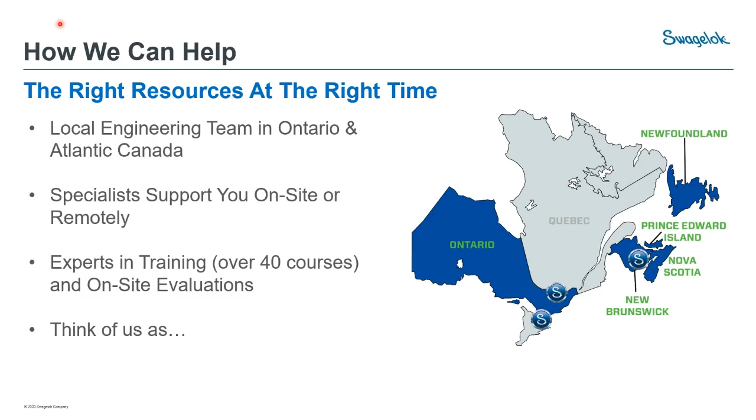Swagelok Central Ontario and Atlantic Canada has 3 locations: Mississauga, Ontario, Ottawa, Ontario, and Saint John, New Brunswick. We provide local engineering and technical support across central, eastern, and northern Ontario, as well as all of Atlantic Canada. We're one part of an extensive global network of Swagelok sales and service centers that are here to help you with your applications and share knowledge through our extensive training and system evaluation offering, much of which we are adapting to provide virtually to you. Whether you need help with an application or to improve your knowledge in a specific area, whatever your pressure, think of us as your solutions provider.

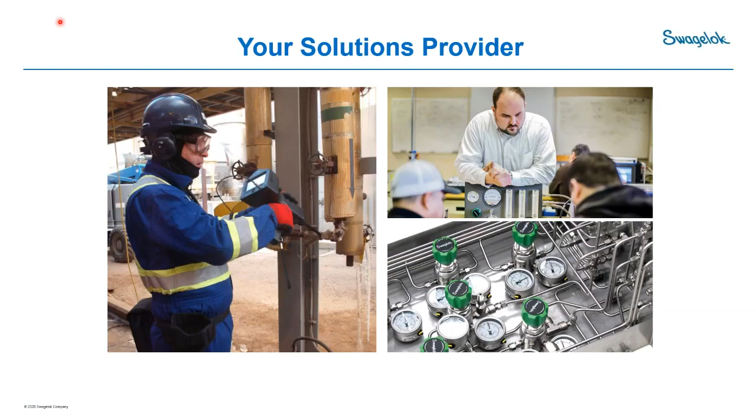Thank you, Tim. My name's Phil Reid. I'm the Training and Technical Support Manager here at Swagelok Central Ontario and Atlantic Canada. We manage a team of field engineers. We provide training, fabrication, assembly services, and resources to support you.

Joining me today, we're very fortunate to have Phil Daniels. Phil is a professional engineer here in the province of Ontario, and he's a mechanical solutions engineer. Phil's formal education is in mechanical engineering, specifically focusing on thermofluids, with 6 years with the Swagelok organization. Phil is one of our technical support advisors in hose. He can perform audits and hose advisory, pressure regulator selection, and solutions for high pressure systems right up to 60,000 PSIG, and seal support systems, API 682 and various other seal plans.

And Phil's dressed here in gear ready to go in and do an audit in a plant. So Phil will be helping and supporting and answering some of the questions as they come in today. We have a fairly large crowd and we like to share that. We put 2 Phils on this just so that we would confuse everybody right off the start.

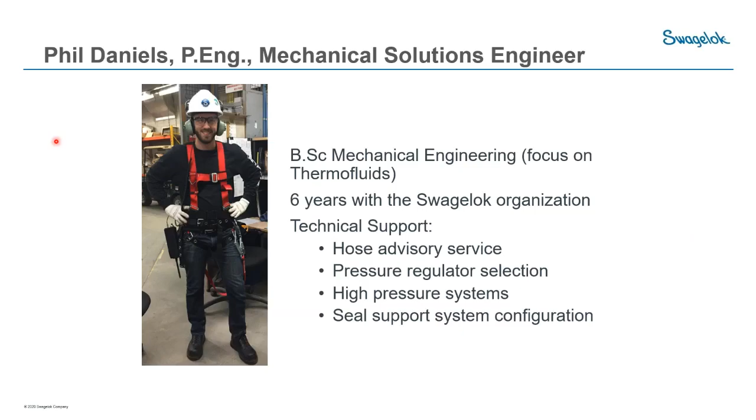So today's Tech Talk is around regulator basics, and specifically today we want to talk about the difference between a valve and a regulator. We want to understand some terminology around regulators because the speak is always the same. We'll differentiate components within the regulator and what their jobs are and how they contribute to performance, and then recognize these performance attributes of various regulators.

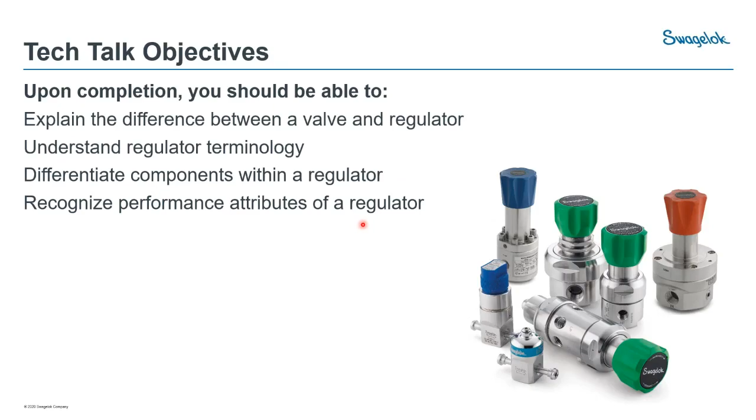So today's talk will be around the 2 most common regulators used today, the first being a pressure reducing regulator, reducing pressure from a higher pressure to a lower pressure. We'll talk about the performance criteria, some of the terms and definitions, and how this applies to selecting a regulator.

We're going to look at back pressure regulators. Back pressure regulators are a little bit different than a pressure reducing regulator, so we'll get into the basic theories of a back pressure regulator. We'll also talk about the terms, definitions, and criteria for selecting one. Then we'll put all of this together and come up with how we judge performance and the criteria that affects selecting a regulator.

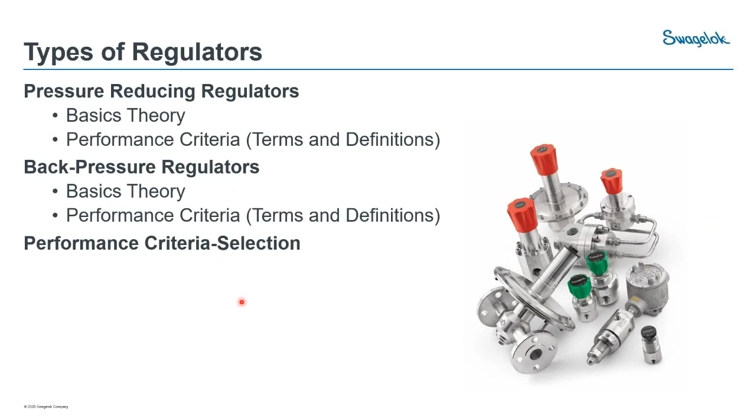So we're going to start by talking a little bit about a valve, and how a valve controls flow while a regulator controls pressure.

A manually operated valve like this does not self-adjust to maintain flow. A pressure regulator will self-adjust to maintain a specific pressure. If we're looking at a higher pressure, reducing it down to a lower pressure, it's dynamically working all the time to maintain that pressure, so it provides a constant pressure so that an orifice can control flow. If you have a regulating stem tip or metering stem tip on the valve, you simply extract or draw that stem out, increasing the cross-sectional area of the orifice. So regulators control pressure, valves control flow - two separate jobs.

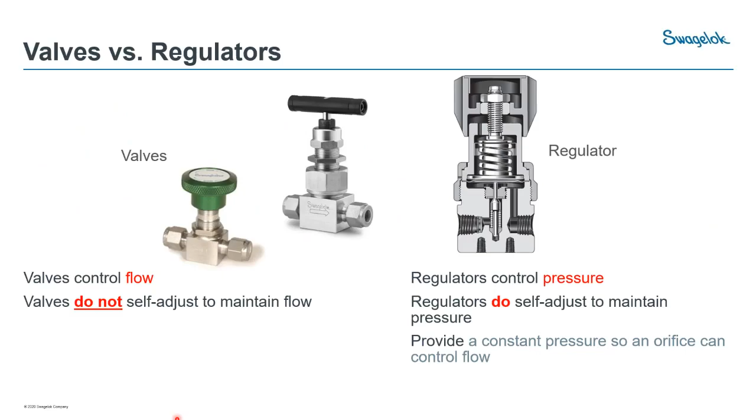Let's look at these two regulators we're going to talk about today. First, a pressure reducing regulator controls pressure by sensing outlet pressure, and controls its own downstream pressure. Here we have a high pressure source being supplied to a regulator at the inlet, going to the sensing chamber and providing that constant downstream pressure to a process, experiment, or instrumentation.

What a back pressure regulator does is control pressure from the process, and it controls upstream pressure. Similar to a relief valve, but it is not a relief valve. As pressure builds in the process, this will open when the pressure is built, and it controls upstream pressure. So that's a back pressure regulator and a pressure reducing regulator.

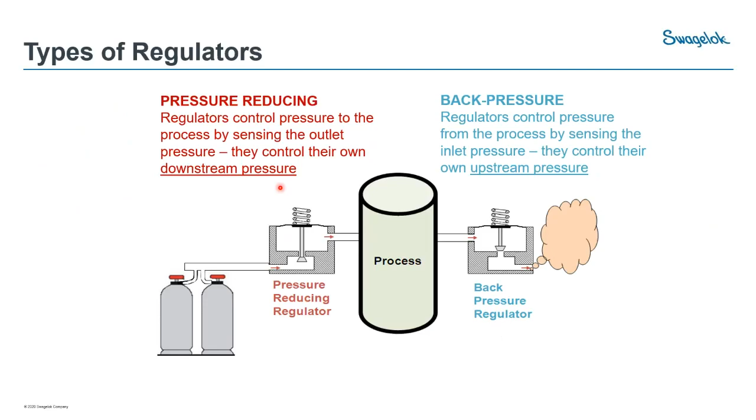Let's take a closer look at a pressure reducing regulator and how they're constructed. First, we have a control knob or adjustment knob at the top - this can be a thumb wheel or knob. We have the stem, which has fine threads on it, fine pitch threads, so you can get more accurate control. There will be a range spring. If you have a regulator that is 0 to 100 psi or 0 to 500 psi, the bodies may be the same, but the range spring will change.

That's the force applied to the sensing element. As we move on down, we have the body cap, the cap ring, and inside we have the convoluted diaphragm, which is the sensing mechanism. Behind that, there's a backer plate so that if someone reversed these orifices, you wouldn't have a catastrophic failure and blow the diaphragm out. We'll talk a little more about these later.

So we have an inlet, and on the inlet of these regulators, notice there's a fine filter in here - when I say fine, it's 25 micron. Most regulators cannot tolerate particles because this is a very small space, and we'll talk more about that as well. So we put a filter in here to try and catch the fleas and ticks, if you will, and not the cats and dogs. Moving ahead, we have the body and the outlet.

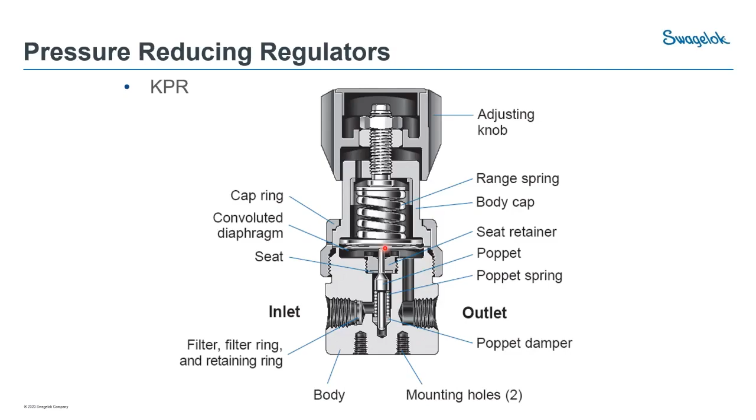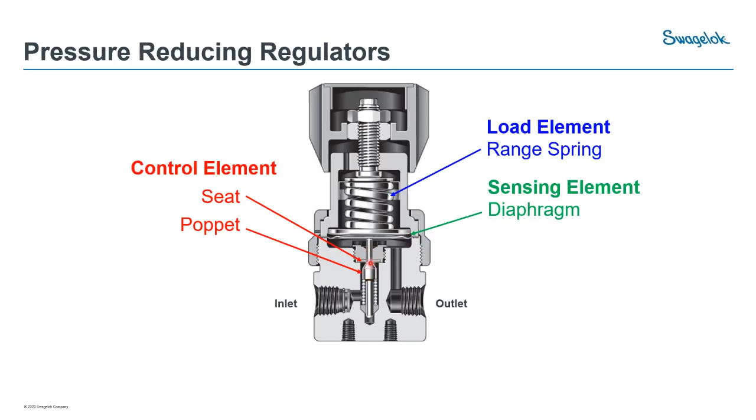This is the sensing chamber. We have the poppet and the seat. Let's break this down a little more and take a look at what's going on. So in the top of the regulator, in a pressure reducing regulator, we have the loading element, we have the range spring, which is applying the force onto the sensing element. And in the bottom of the regulator, we have the poppet and the seat, which are the control elements. These are dynamically moving to allow pressure to bleed up into the sensing chamber.

If we take a closer look at these parts in that control element, the poppet, we have a damper at the bottom, which helps with resonance or vibration of the poppet and prolongs life - it makes it more stable. There's a poppet spring. It provides a little bit of force to help close the poppet or seat the poppet into the seat. Keep in mind, a regulator is not a shutoff device - a regulator is unreliable to be used as a shutoff device. So the poppet seats into the seat, and then there's a retainer that holds this mechanism all together.

Above the sensing chamber, in the upper works, we have the loading element, the adjustment stem, and spring button, which simply keeps alignment of the range spring. We have the stop plate that is there - as I mentioned, if we have a catastrophic failure, someone reversed the ports accidentally of the regulator, and we did not have this, we could have a catastrophic failure or blowout of the diaphragm.

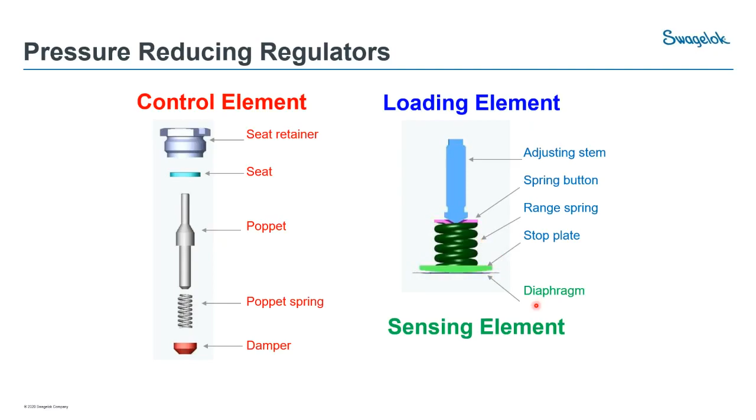So taking a closer look at the diaphragms, depending on the pressure, it will affect the sensitivity.

Diaphragms are generally used up to about 500 psig, and they have a backing plate as I mentioned. They have greater sensitivity, are more flexible, and have better compatibility since there are no elastomers in the wetted area of the regulator. This is an alloy X750 diaphragm, so it's metal.

In the piston sensing type, keep in mind there will be an elastomer that has to seal. When you get into higher pressures, 500 psi and up to 15,000 psi and beyond, it's a piston sensing mechanism, so it's a little less sensitive, still very sensitive, but a bit less. We've now introduced elastomeric materials to seal the system. So again, a diaphragm is typically used below 500 psi, and a piston at higher pressures.

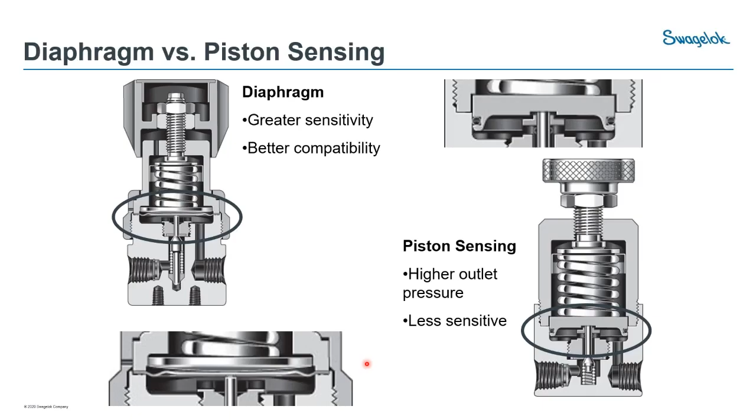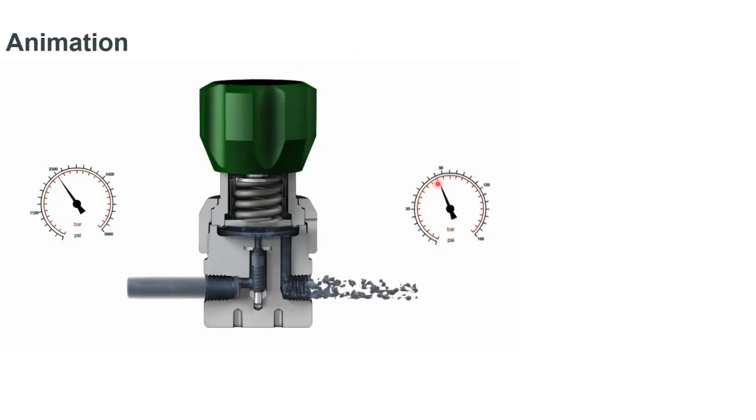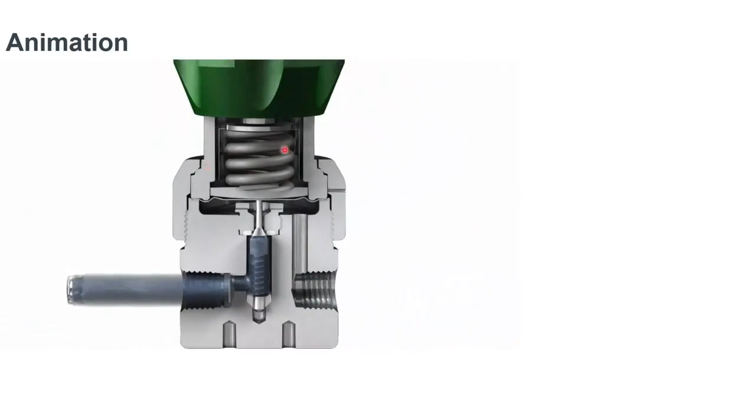Let's have a look at this animation and see what happens. As we tighten down the control range of this regulator, the pressure rises and puts a force on it. As that force pushes the poppet down away from the seat, it allows pressure to bleed up into the sensing chamber and then go to the outlet.

Taking a closer look at what's happening, we have forces that we're trying to balance. F1 is the range spring force acting down on the diaphragm sensing mechanism. F2 is the little poppet spring that also helps seat the poppet back in the closed position. We have outlet pressure forces acting on the diaphragm as well, which must be taken into consideration, and we have our inlet pressure forces.

So our force balance equation would look like this: F1 equals F2 plus F3 plus F4. If we change anything in this equation, we're going to get a different output.

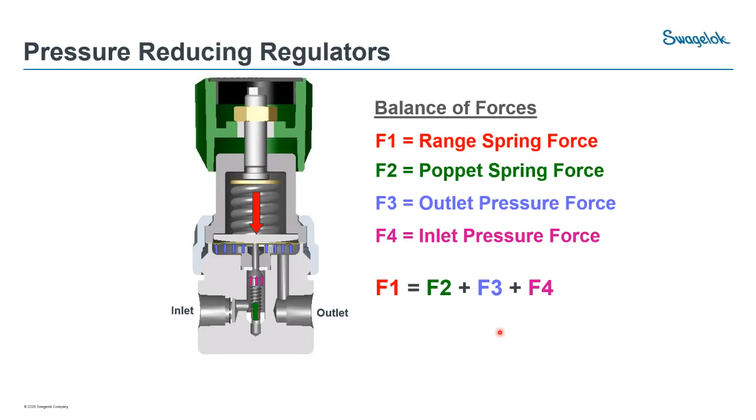Taking a closer look, we're going to look at the high pressure side. As we tighten down or compress the range spring at the top of the regulator, it pushes the poppet down away from the seat, allowing a small opening into the low pressure side for pressure to bleed in. As it bleeds past the poppet, it goes from high pressure to low pressure. This opening is about 2/10,000ths of an inch, or a fraction of a millimeter, so it's a very small opening.

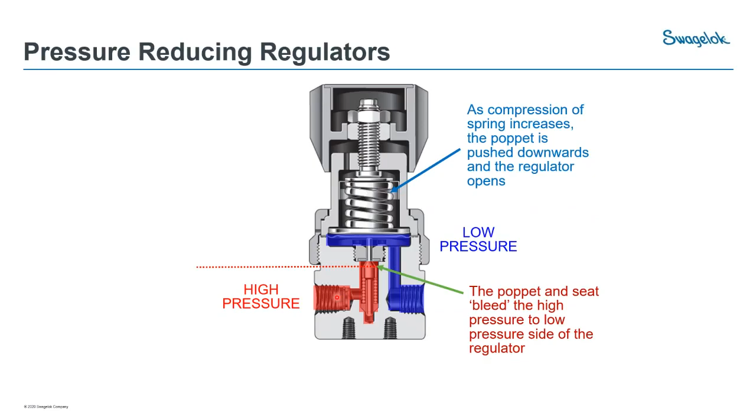Recall what I mentioned earlier about having a filter — we'll see the effects of this a bit later, but a very small particle in that very small area can have adverse effects on regulator performance. As the sensing diaphragm balances the pressure forces, it's continually, dynamically moving as things change, balancing these forces to continually give you that output pressure. That's basically how a pressure reducing regulator works.

And with that, Phil, do we have any questions at this point?

One question so far: what is the piston rated for? Good question. The typical sensing element styles are a diaphragm style, which could be metal or sometimes other elastomers, or a piston element. The diaphragm, while more sensitive, has a lower pressure rating, but the piston can be rated up to 10,000 psi in most regulators at the high end. So the inlet rating of the regulator would be 10,000 psi, as well as the piston itself — well suited for high pressures up to 10,000 psi.

Thank you, Phil. Now let's look at a back pressure regulator. It works a little differently, but we have a loading element, a sensing element, and a control element, similar to before. In this example, we'll notice we do not have a poppet — there are poppet-style back pressure regulators that we also manufacture, but in this case there is no poppet. A spring force is set for the upstream pressure, since we want to maintain a specific pressure, and we set that through the range spring.

As we have this set, the seat is initially closed. We can see that the diaphragm here is sealed down onto this elastomer. There's no poppet. So now the force of the spring is forcing the sensing element down to seal on the seat. Then, if the pressure is less than the set pressure, this will remain closed.

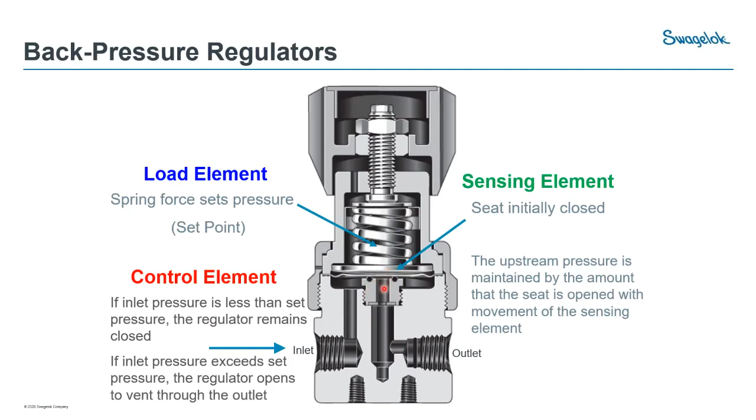This is called accumulation, and we'll look at that a little bit later. But as we increase pressure, this will open more, and so you will have an increase in the amount of pressure. So just having a look at these two, we look at our pressure reducing regulator here on the left and our back pressure regulator on the right.

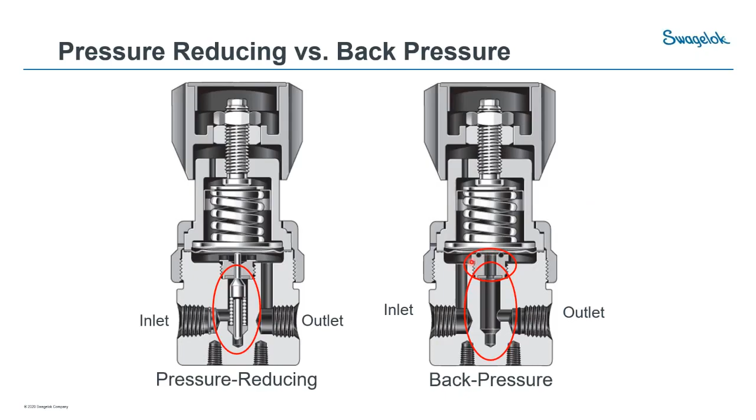So if you notice a couple of things, we're looking at the inlet going up through the poppet and then bleeding into the sensing chamber. In the back pressure regulator, the inlet goes into the sensing chamber and then senses, and if it increases, it will then lift the diaphragm off the seat and allow that pressure to vent out.

So very similar to our pressure reducing regulator, we have these key elements, and the force balance equation again, we have F1 being the spring force, so the loading force. The next force we have is this inlet pressure force acting on the diaphragm, and this is a convoluted diaphragm too, by the way, because that increases the surface area and has an effect on increasing sensitivity. Force equals area times pressure. So if we increase that surface area, we have a greater sensitivity.

And then we have the outlet pressure forces. When they're present, these must be lower than the inlet pressure force, obviously, because otherwise it would start to raise the diaphragm and allow it to bleed in the opposite direction. So again, these go together and it looks like F1 equals F2 plus F3. And as we apply the load, as we mentioned, the force down onto the element, it's being sensed, and then we have this balancing of forces.

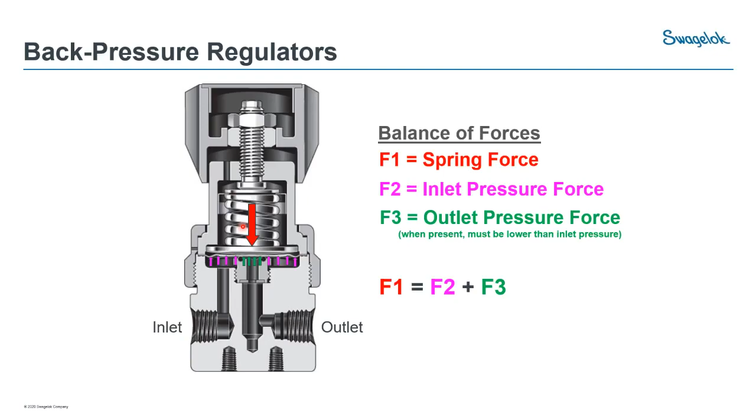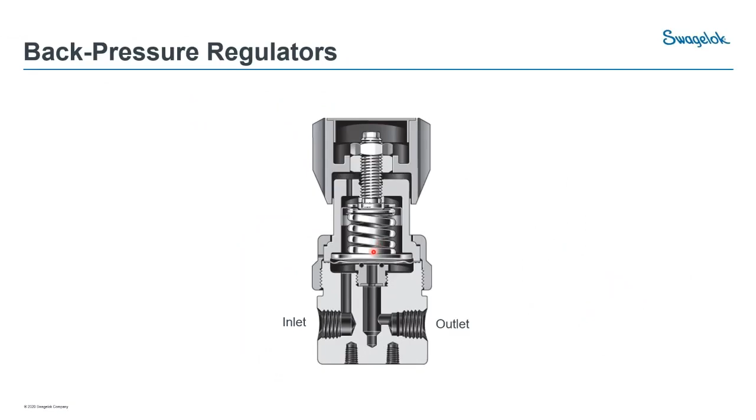So we have the regulator with the inlet, and as this compresses this spring, it's held down onto the elastomer that seals it up, and here we have pressure present in the sensing chamber. Now that pressure has overcome the force of the spring and allowed pressure to, if you will, bleed off through the outlet.

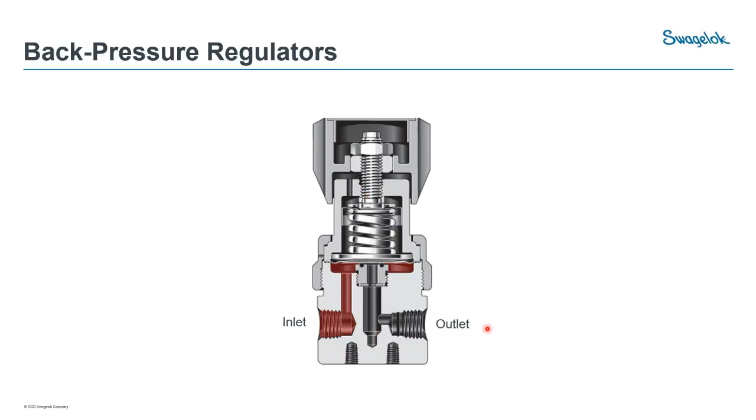Phil, do we have any questions on back pressure regulators at this point?

Thanks, Phil. Yeah, we have one question here of when would you use a back pressure regulator versus a relief valve? Great question. Functionally, they are both very similar. They have a sensing element and then they lift to sort of bleed off pressure, but it's more about the application and where they should be used. So a back pressure regulator is intended to be a more sensitive device and used in a regular process. So it should normally open and modulate to set a certain process pressure. For example, it may be set at 100 psi if you want to maintain a process at 100 and not any higher. So if pressure does build up, it will bleed off and slowly open to relieve that excess pressure.

Whereas a relief valve is more of a safety device. So again, it does sense that pressure and relieve when there's overpressure, but it would be above the normal working pressure. For example, the process would be 100 psi. The relief valve may be set at 120 psi. So if there is that overpressure event, it can bleed off and relieve that excess pressure. Now it's important to note there's certain situations where there's an ASME safety code relief device required, so that is a special consideration. And of course, back pressure regulators should not be used in that application.

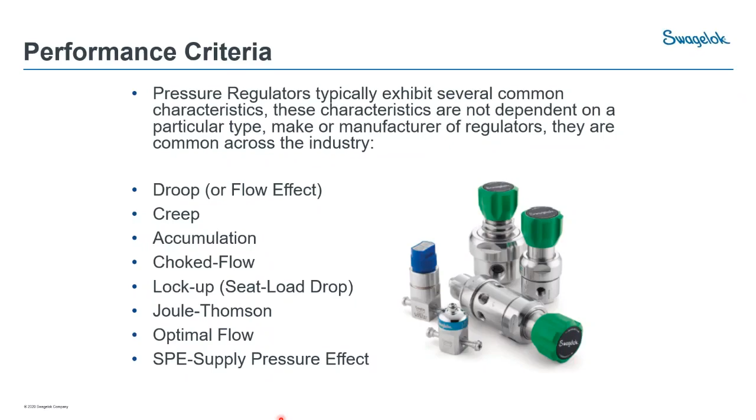So again, regardless of who the manufacturer is or the type of regulator, it will exhibit these characteristics, and these are used when you're looking at flow curves. The flow curves are absolutely the best way to select a regulator.

So the CV of a regulator is measured when it's in the fully open position, and most regulators do not function in the fully open position. So in practice, the C sub V of a regulator is variable as it throttles. Remember, it's in a dynamic situation, so this is moving and it's basically throttling.

So the flow curves in the catalog provide the best means of determining the CV, as these are based on actual flow data. All the curves that we provide, and Phil Daniels, and we have a couple other regulator specialists, can provide you with help when selecting a regulator, to get you to an optimal flow range that's going to give you the optimum performance.

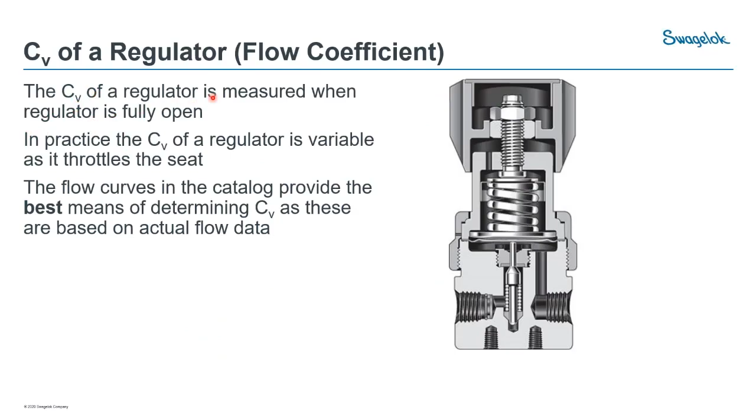So flow curves are the best. If you're sizing using the C sub V, keep in mind that that CV is at the fully open position, and we'll take a look at a flow curve. So the best method is to use a flow curve.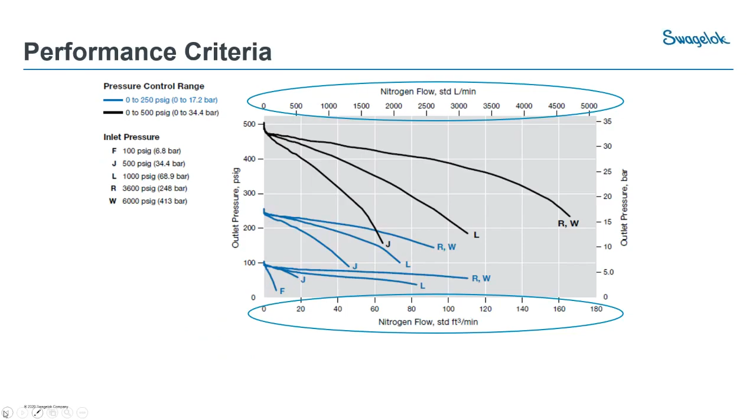So let's take a little closer look at what we're talking about. The first one is droop or flow effect. If we've set the regulator static, in a static condition here at about 22 psig, what happens as soon as we start to flow - we get what is called seat load drop. So it drops, and then we start into a flowing condition. Droop is the reduction in outlet pressure experienced by pressure reducing regulators as the flow increases. So this curve is known as droop - as flow increases, a flow effect, you start to experience droop on the flow curve.

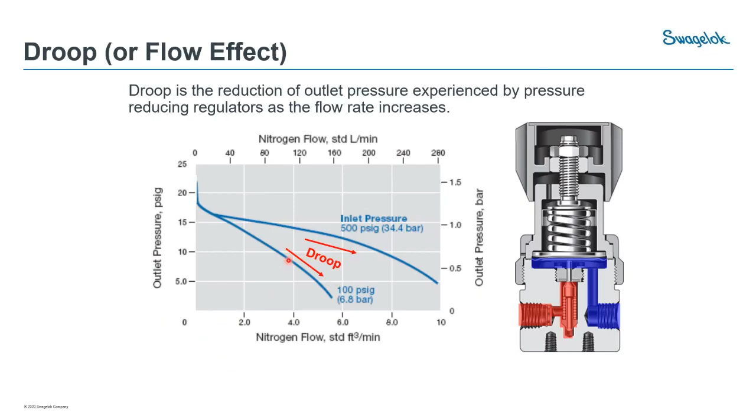So now looking at this, we can determine where our optimum flow range would be. Let's take a little closer look at droop. We've set our regulator static at the 22 psig, but now we've increased flow. We now have more flow required downstream, to around 2 standard cubic feet per minute. As we increase up to 4 standard cubic feet per minute, we drop down below 15 psi. As we increase out to around 6, we're down probably to 12 or 13 psig.

So we haven't adjusted the regulator. All we've done is increased the flow demand downstream. So now we're starting to have an effect on the regulator, and that is the droop of the curve. If we go on down, looks like around 9 psig in our outlet pressure at 8 standard cubic feet per minute. So taking a look at these flow curves, you will be able to determine, with other information we're going to talk about, if the regulator is suitable for your optimum flow and pressure range.

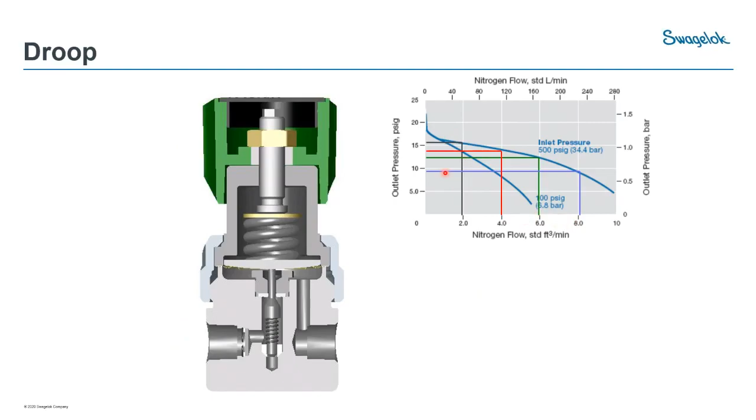Another thing that's very important is creep. Creep is an increase in outlet pressure over time. A regulator is not a shutoff device, and there's a very small gap when the poppet drops away from the seat, in that 2/10,000ths of an inch range, for the pressure to bleed through. So you can imagine if a small particle got lodged in there and held this regulator open, we're going to start to experience creep.

It's if the poppet does not fully seat in the orifice, and this can be caused by contamination, and this bleed through can equalize over time. So over time, the leakage can increase to a point where it's equal to the inlet pressure.

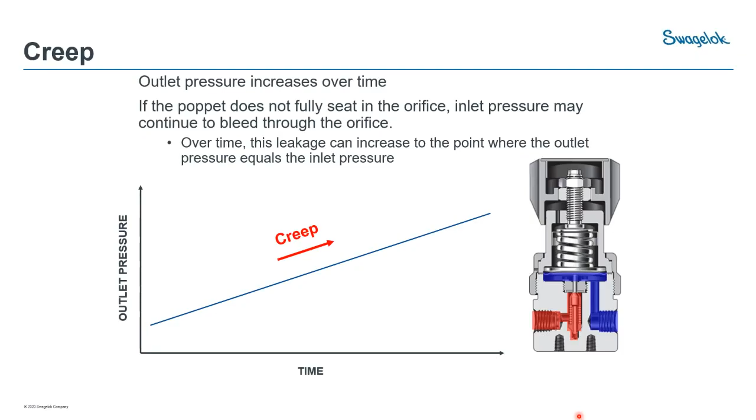So some of the causes of creep: number one is contamination. Something to keep in mind when setting up your system—if it's off a cylinder, for example, you get a certificate saying the gas is 99.99% pure, but you don't receive anything indicating how old that cylinder is or where it's been. So there can be rust or different contaminations inside the cylinder.

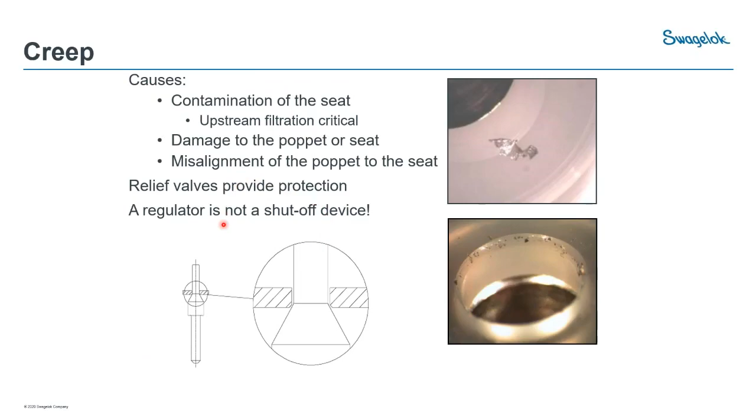This can damage the poppet and the seat. Misalignment of the poppet can also happen. These are actual photographs of particles deposited onto that tiny seat. As I said, when that opening is about 2/10,000ths of an inch, a very small particle would keep it open and allow it to continue to bleed. Keep in mind—I'll repeat it a few more times—a regulator is not a shutoff device.

So why is creep dangerous? If you have, arbitrarily, a 3000 psig source and you're dropping it down to 100 psig, and the downstream is designed for this lower pressure—if this valve got shut off and we're experiencing creep in this regulator, we could have some catastrophic effects downstream.

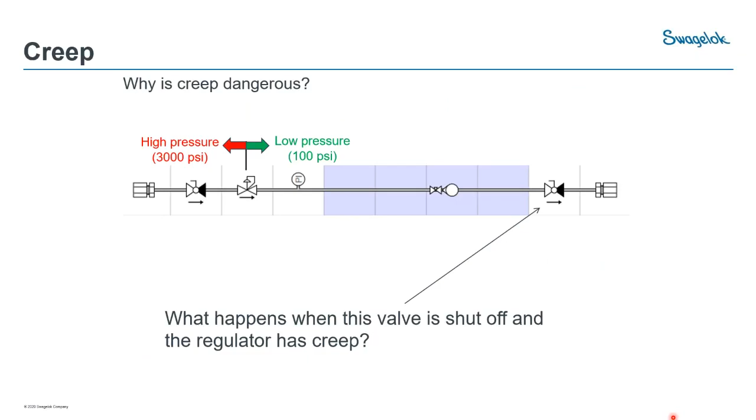So what are some things we might be able to do? Filtration, as I mentioned, is very important—we can filter the fluid to minimize damage to the regulator, so we added a filter before the regulator. A relief valve protects from failure if creep does occur, so we've added a relief valve on the downstream side. As Phil mentioned earlier, ASME code may be required for an actual safety device. If possible, always add a shutoff upstream of the regulator so we're not relying on the regulator as a shutoff device. Here I go again—a regulator is not a shutoff device.

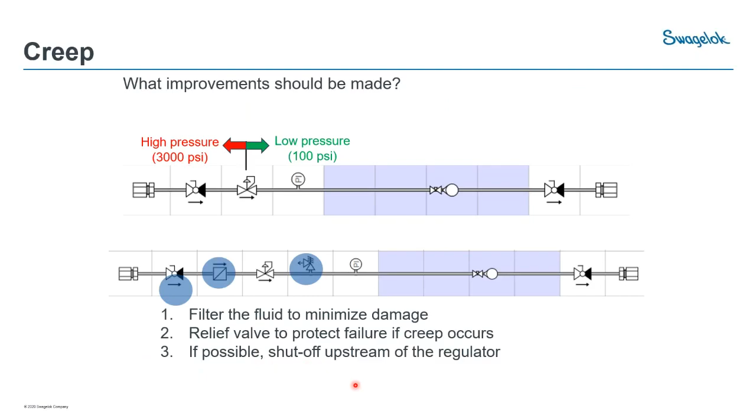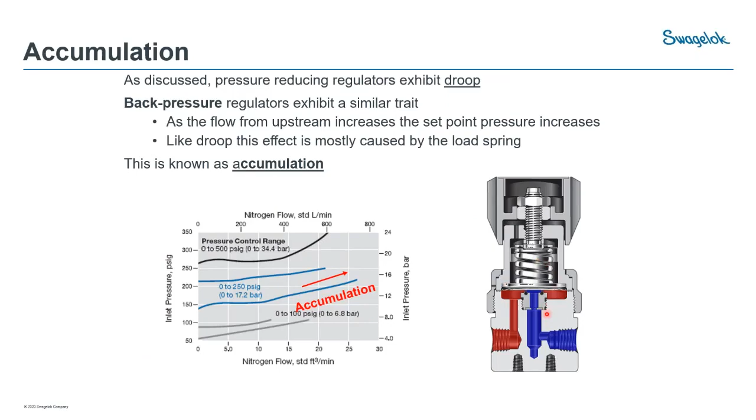Next is accumulation, which relates to a back pressure regulator. As we discussed droop earlier for pressure reducing regulators, that same effect in a back pressure regulator is known as accumulation. As flow from upstream increases, the set point pressure increases. Like droop, this effect is caused mostly by the spring load. So if we have this set at around 150 psig and we're experiencing overpressure, it starts to bleed some off in the flow—as that pressure increases, the flow increases, and that's known as accumulation, the amount or volume of flow allowed through that regulator.

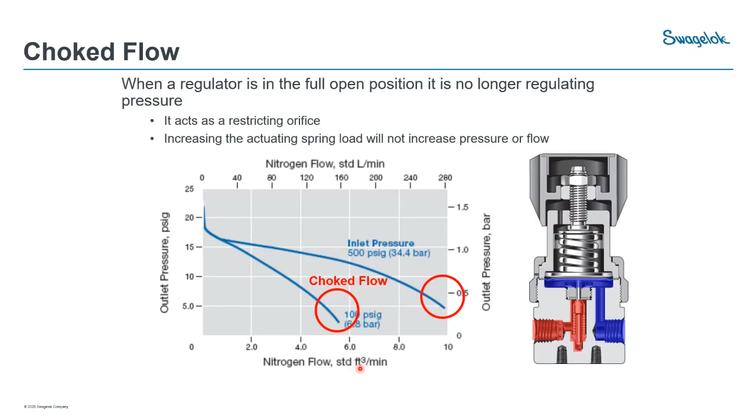By increasing the actuating spring load will not increase the pressure or flow once you've come to a choked flow position. This is lockup, the difference between a flowing and a non-flowing regulator.

When flow is stopped, or the flow is starting to be reduced, we start to come back on the flow curves as we reduce downstream demand. Then the balancing of forces puts the regulator into what's called lockup, at about 20 psi, below our set point of about 22 psi. So when it goes back to a static condition, you'll be reading about 22 psig on the actual regulator.

If we shut this valve off, we're going to see an increase in downstream pressure, and this is known as lockup. If we start in this position and move to a flow condition, this is known as seat load drop. So going from a flowing to a non-flowing condition is lockup, and going from a non-flowing to a flowing condition is known as seat load drop.

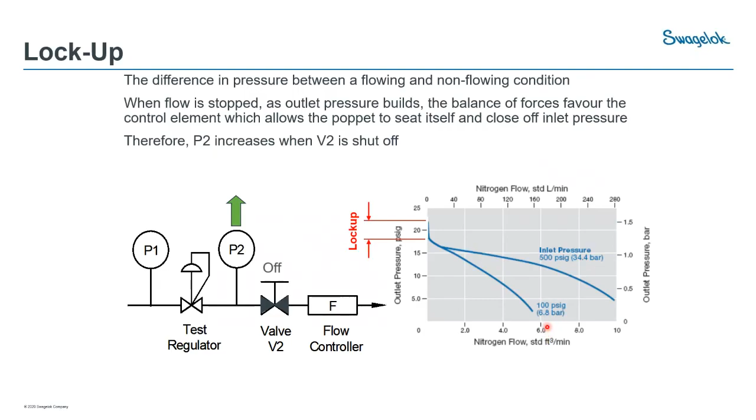As an example, with natural gas, the average temperature drop will be approximately 1 degree C for every 2 bar, or approximately 30 psi.

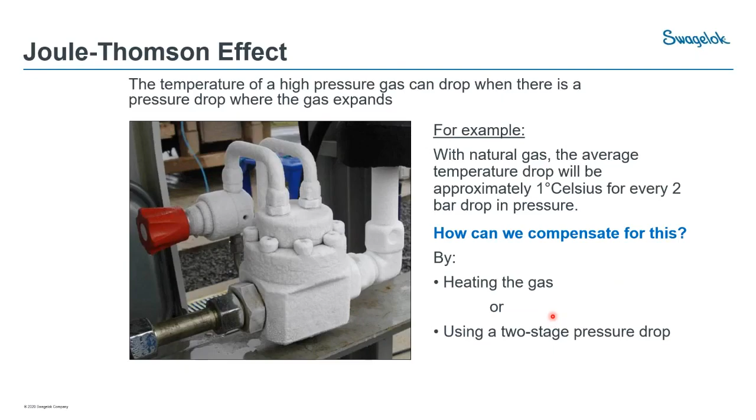Now how can we compensate for this? Well, we can heat the gas, we can put heat tracing on, we could use a vaporizing regulator, or we could add stages to the regulator. We could have 1, 2, or 3 regulators, so our pressure reduction is much smaller as we move to achieve the actual set point we're looking for. So there are various types of regulators to address this.

Let's take a look at some of this information on a flow curve now. We want to look at where the optimal flow range is, and we want to avoid the choked flow area. We know that we have lockup and seat load drop in this region.

So the portion of the flow curve where the regulator has its best performance is known as the optimal flow range. Here we see in this regulator, this is the flattest part of the curve. We want to stay within this range, and this would be the operating range where we'd look for the best performance out of this regulator.

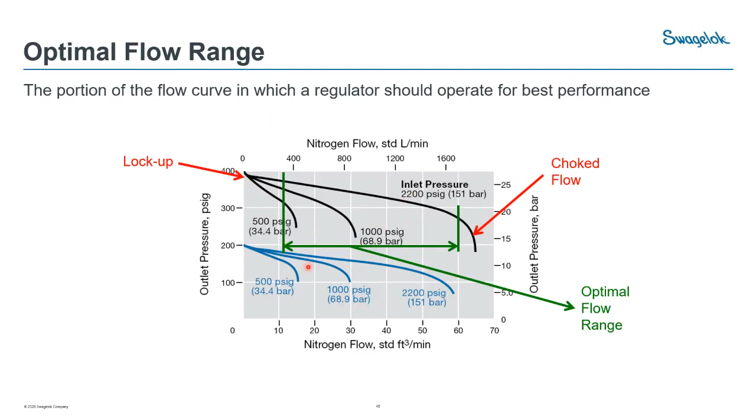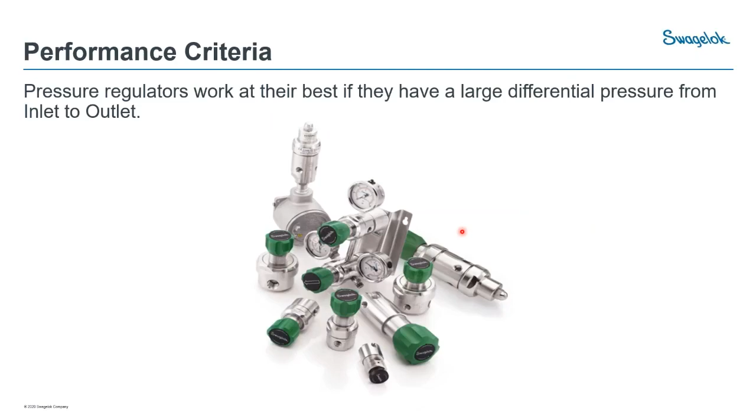A pressure regulator works best when you have a large differential pressure, going from a very high inlet to a low outlet. It really achieves its job in the balancing of forces when you have these high inlet pressures and lower outlet pressures. So a regulator should be used in the upper region. If you're trying to control 90 psig, you'd want to use a 0 to 100 regulator, not a 0 to 250. You have great performance and great resolution in the upper end of the performance range, so again you want to try and have a larger pressure differential.

The optimal flow range is the portion of the flow curve we talked about that we should operate in. If we look at this example, we've set our regulator at 22 psig at the point of lockup. We've now found on our flow curve the 160 standard liters per minute, so we can assume our regulator will now read on the pressure gauge about 13 psig as we remain static, having not changed the setting. From the set point of 22 psig, as we start to flow out to around 160 standard liters per minute, we're now going to be flowing at about 13 psig. So the difference from the start point to the outlet pressure - 22 psi is our start point, and our flow now is 13 psig - that's known as droop, or in this case, we have droop of about 9 psi.

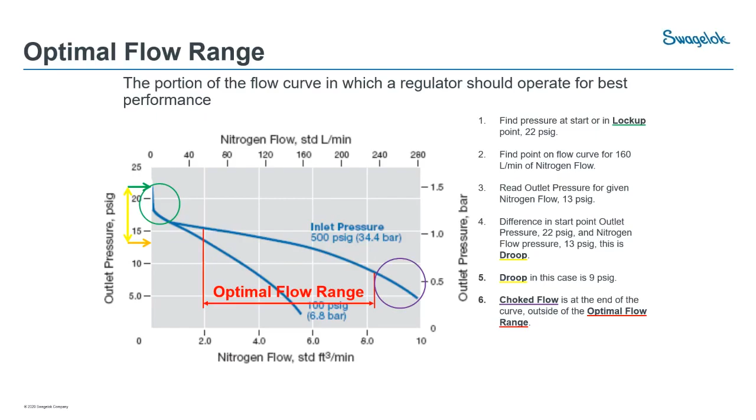So droop is important to take into consideration because we really want to avoid that lockup and choked flow regions, and we want to stay in that optimal flow range for the regulator.

And Phil, do we have any questions at this point? We do. The first couple questions here are about droop. So how do you combat droop, and how can droop be reduced when you have changes in flow?

Really good question. Phil mentioned a bit about what droop is and how it occurs. But as far as how to combat droop, if you look at different styles of regulators, the primary thing you do is lengthen the spring. We do have some models with a longer spring, which allows that as pressure and flows change, it has less effect because the spring is so long. But beyond that, there's other styles such as dome-loaded regulators where you eliminate the spring altogether, as well as external feedback and using pilot regulators.

Especially when you get into the larger process regulators up to 2, 3, or 4 inch, and when you have higher flows and flows that are fluctuating, that's when you may want to look to going to a dome-loaded or external feedback where you are feeding back that pressure and creating a more stable outlet flow, which you might not experience from a smaller spring in your regulator.

Another question here is about if there is increased accumulation, will the repeating result in a lower pressure set than the original set pressure on a back pressure regulator, I'm assuming. Generally, you do get repeatable set pressures. When you look at back pressure regulators versus relief valves, one of the main differences is in that sensing element. Relief valves are often for higher pressures, with a small surface area on a piston or a poppet - that's typically where you do have resistances that may change. But a back pressure regulator typically has a wide diaphragm, so you can get very repeatable set pressures as pressure accumulates and then comes back to your normal pressure.

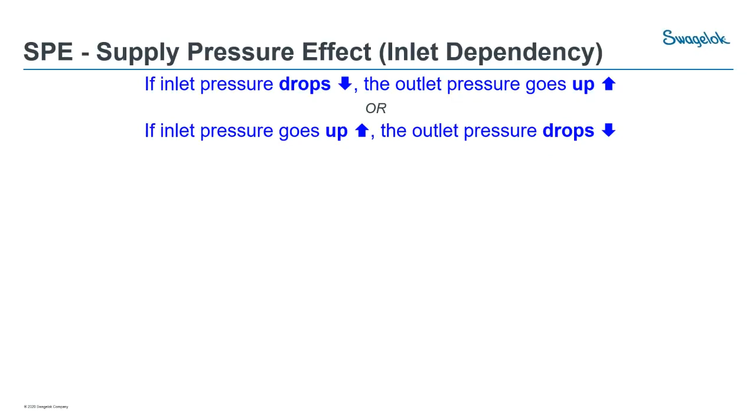Thank you, Phil. Really great questions. So let's move on and take a look now at the last one, supply pressure effect, or otherwise known as inlet dependency. So if the inlet in a single stage, also known as a line regulator, if the inlet pressure drops, the outlet pressure goes up. Or if the inlet pressure goes up, the outlet pressure drops. Again, keeping in mind the balancing of forces.

So if the inlet pressure creates this force on the poppet, the higher the inlet pressure, the higher the force, obviously. So we look at our force balance equation, and we have F1, F2, F3, F4, and this will affect the balance. So we want to take a closer look at this.

If we had a single stage line regulator, for example, on a cylinder, and that cylinder's pressure started to decrease - the inlet pressure starts to drop as our cylinder's starting to decay - and we haven't changed anything in the setting of the regulator, so this spring force will overcome those other forces we're balancing and open the poppet more, allowing greater pressure to come through, so the outlet pressure goes up.

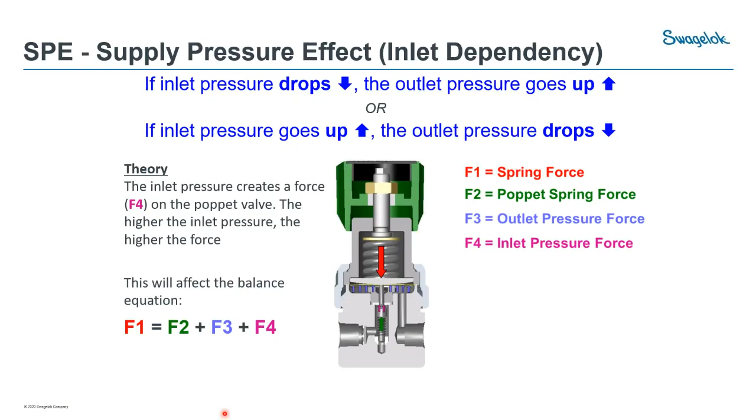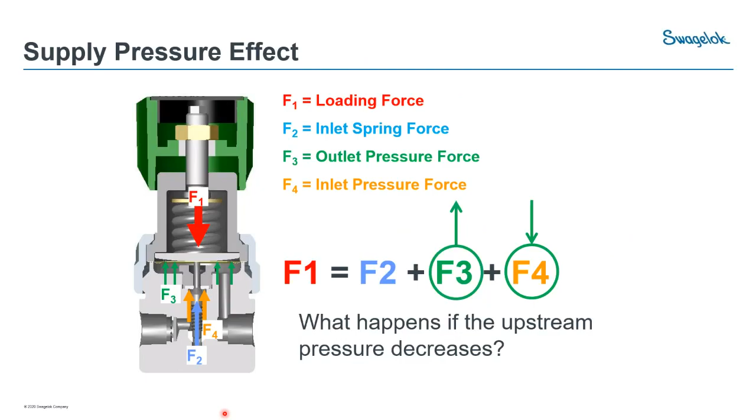If we look at printed or published catalog literature from various manufacturers, and this happens to be from ours, we have supply pressure effect stated as a percentage of the control range - so of the reduction. If we look at the 0.06 flow coefficient up to 100 psig control range, our supply pressure effect is 1 in a single stage line regulator.

If we now look at a 2-stage regulator, and we use that same flow coefficient and the same up to 100 psig pressure control range, it's now 100 times better: 0.01%. Okay, what does that mean?

Please keep in mind I just chose these numbers because 1 and 1 are easy to work with. This supply pressure effect can be greater or even less in certain cases, so just keep in mind to look at the supply pressure effect.

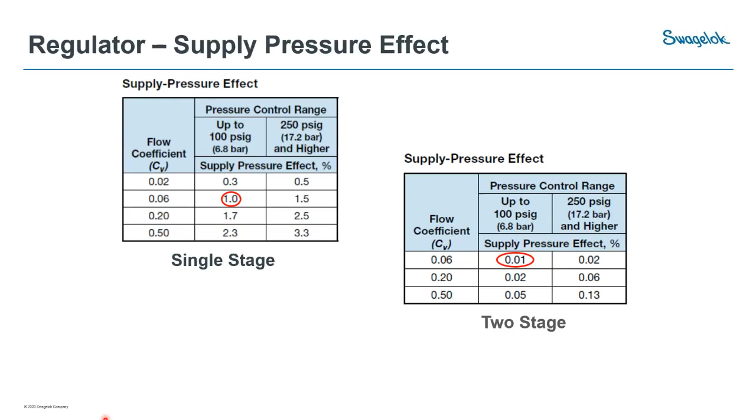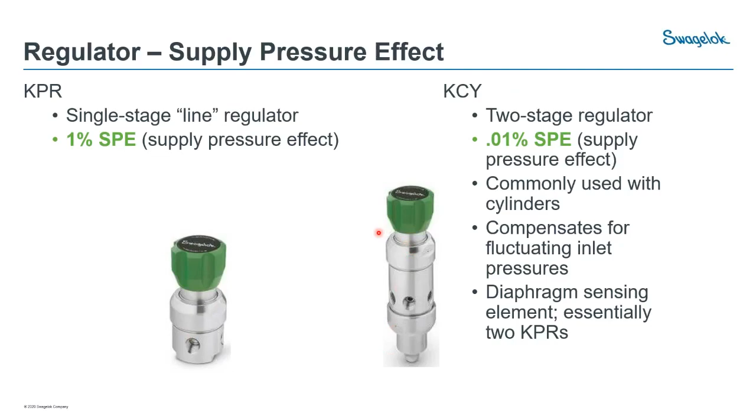So we see the single stage line regulator, most commonly known as a line regulator, has a 1% supply pressure effect. The KCY, typically known as a cylinder regulator, 2-stage regulator, has a 0.01% supply pressure effect. Very often used on cylinders, it compensates for that fluctuating inlet pressure. It's diaphragm sensing, and essentially what we have here are 2 KPRs machined into one body back to back. All right, let's have a look at this.

The KPR has a supply pressure effect of 1%. So if we've set our regulator to 50 psig outlet pressure, and we drop from 2,000 psi in our cylinder down to 1,000, our outlet pressure is going to increase by 1% of that. 1% of 1,000 equals 10, so we're going to see an outlet pressure increase of 10 - going from 50 up to 60 psig - when we've had this 1,000 psi decay in our bottle.

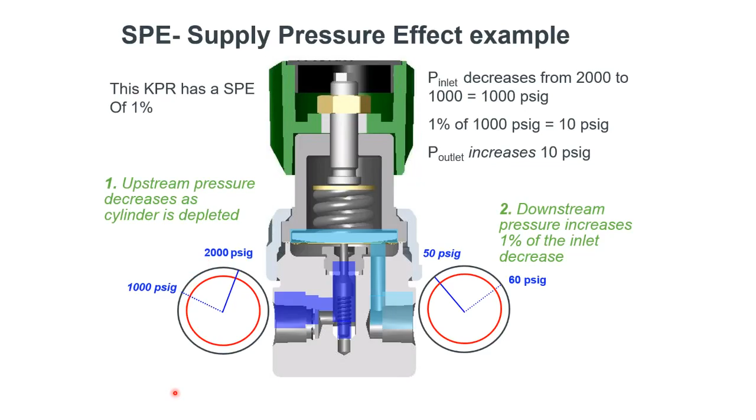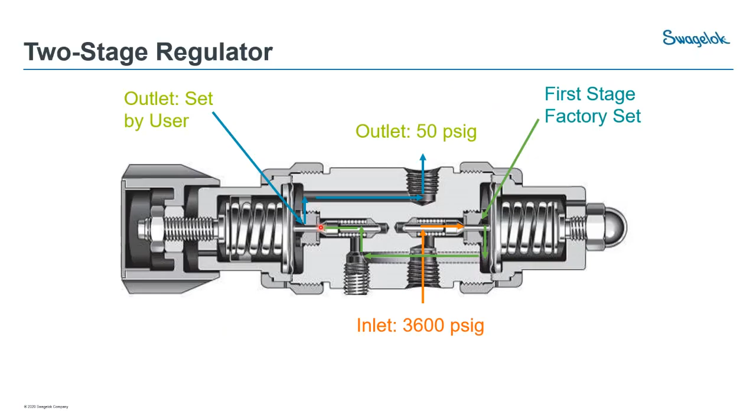So now let's take a look at this regulator. Here we have 2 KPRs machined back to back, as I mentioned. We have our inlet pressure coming in, factory set to 500 psig. So inlet pressure comes in, goes through the first stage, the sensing chamber, through a flow path in the regulator to our second stage, which is where we control our outlet - set by the user to 50 psig.

Now let's have a look at the 2-stage regulator. We've got our inlet of 3,600 psig coming into our regulator, providing 500 psig to our second stage. If we had a pressure drop of 2,000 psig, going from 3,600 down to 1,600, coming out of the first stage we're going to see an increase. The increase will be 520 psi as our outlet going to the second stage.

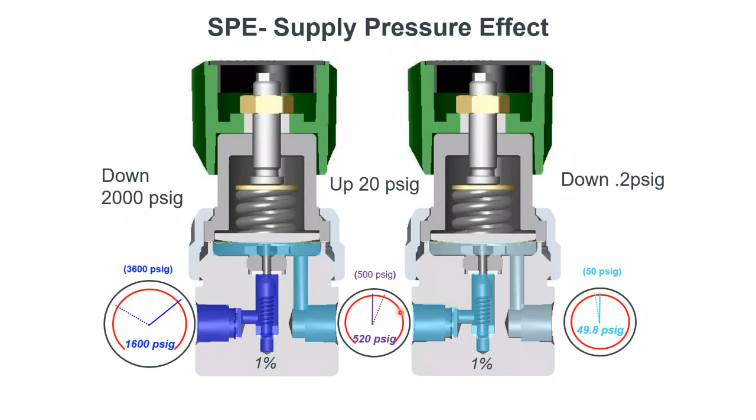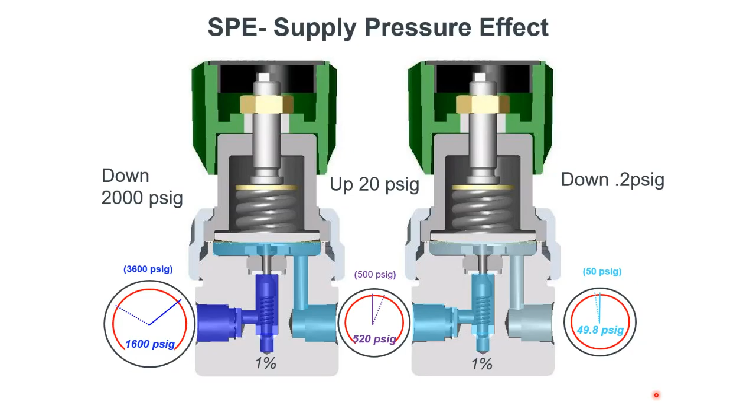Our second stage has received an increase in pressure of 20 psig. So if we have an increase in inlet pressure, outlet pressure is going to drop, but only by 0.2 psig - you're not even going to see that on a gauge typically. If you had transducers in the system or highly sensitive equipment, you would see this. Again, having experienced the decrease in inlet pressure, you get an increase in outlet pressure from the first stage, and now in the second stage, a very small drop in outlet pressure. That helps control the fluctuating inlet pressures.

Something else, the last item here, is venting options. We often get asked about vents, and they can be somewhat confusing to people, so we're going to try and explain these.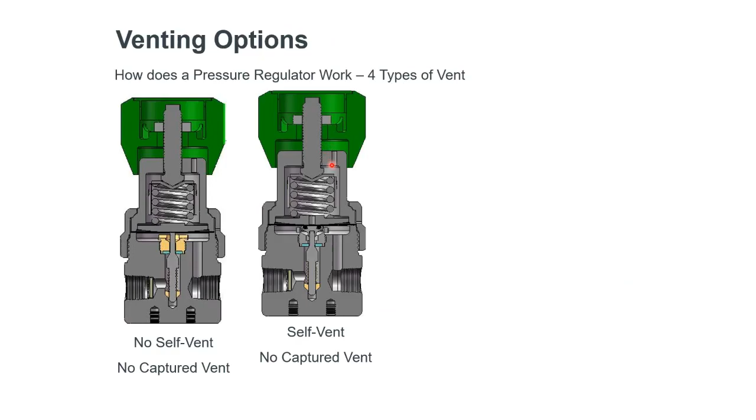So now I can control my downstream pressure in a static condition because I can vent off that excess pressure.

The next one we're going to look at is no self-vent, but it has a captured vent. So now we no longer see the hole up through the body cap. Instead we see either a weldment, or typically a 1/8 female NPT connection.

You'll also see there's an elastomer on the stem to help provide sealing, so that if we had a catastrophic failure of the diaphragm with a hazardous media, you might want a sniffer tube in the bonnet to detect any leakage through that diaphragm. It also helps keep it from passing out past the stem. As you'll notice in these two examples, there's no seal on the stem.

In our last example, we have a self-vent and a captured vent. So now we have the vent up through the diaphragm. We have a captured vent and no hole out under the top. We have the elastomer on the stem to seal.

So if we're flowing in this condition and we're at a higher pressure on the downstream and we want to back it off a little and reduce that pressure, it can be vented through this vent hole, through the backer plate and the diaphragm, and then can be captured.

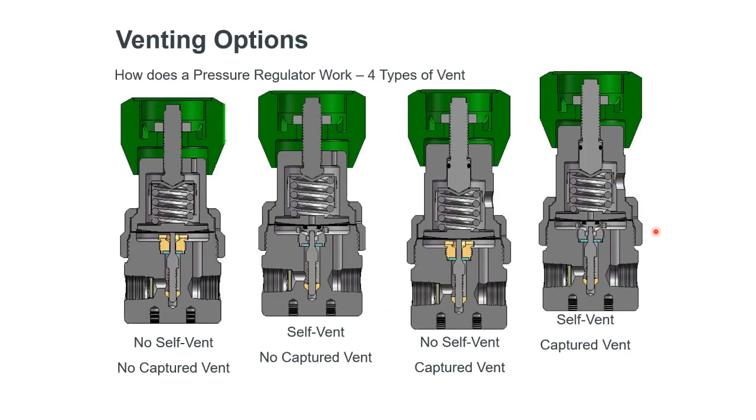So a few things we really want to talk about, and I heard Phil mention a couple of these in answering some questions, but today we covered pressure reducing and back pressure regulators.

So if you were looking at trying to control, as Phil discussed, dome-loaded regulators, differential pressure regulators, cylinder changeover regulators, could have vaporizing or heated regulators. So we have a very wide range of regulators depending on the application, and some of our application solution engineers like Phil could certainly work with you to determine the functionality of what you're trying to do.

We need to know the inlet pressure matched to the maximum supply pressure. If you have a 3000 psi inlet, you want to purchase a regulator capable of 3000 or above supply pressure. This will help determine the models, and it'll sometimes drive you to a different model, or you may have different seat materials, or it could affect the choices of sensing elements.

You want to know what the pressure control range is, matched to the maximum outlet pressure, and as I mentioned, try to stay as close to the high end of that. This will also determine whether you're using a diaphragm sensing regulator or a piston sensing regulator.

Flow requirements, as I mentioned, use the flow curves, call Phil Daniels, call Andrew Wright, call me. We'll certainly help you out.

Calculations. You want to take into account supply pressure effect on the regulator. System compatibilities, again, materials of construction, seat materials, the diaphragms, are there elastomeric materials such as O-rings in the regulator? System functionality will help determine things like venting options and other accessories, certificates for material test reports, etc. And then the various ancillary products: end connections, porting, hoses, mounting, gauges, and the list goes on.

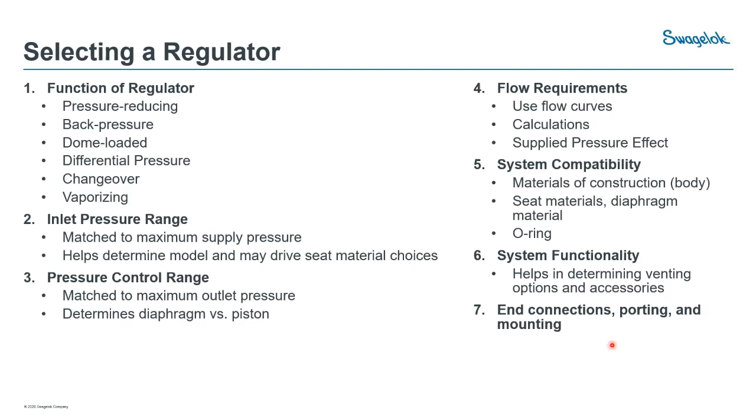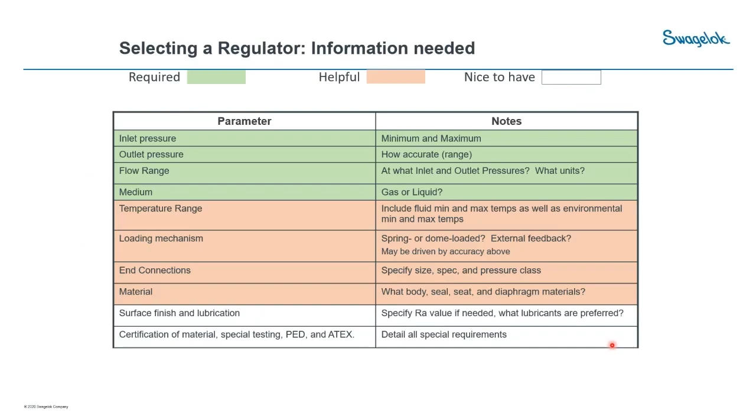So a few things you really need to know: inlet pressure, outlet pressure, flow range, and the medium you're working with. Really nice and helpful to have is your temperature range, the loading mechanism, the type end connections you're going to be looking at, and the materials that are compatible with your system. And then it gets into surface finishes, lubrication, certifications, material testing, and other detailed special requirements.

So at this point, do we have any further questions, Phil? Yeah, thanks, Phil. A lot of great questions today.

Starting with questions about supply pressure effect. The first one: after supply pressure effect, does it restabilize? Well, it would restabilize once the inlet pressure is corrected. This usually occurs when you have a reduction in inlet pressure. For example, say you have a bottle at 3000 psi that slowly empties and the inlet pressure reduces to 1000 - that's when you'd experience supply pressure effect. So when you replace the bottle, or your inlet pressure is brought back to 3000 psi, the regulator would correct back to the original condition.

Another question: is supply pressure effect due to the reduced seat forces of the poppet on the seat causing passing through the seat? Good question. That's sort of a result of how supply pressure effect is administered, by opening up the seat to allow pressure through, but realistically it's caused by the force balance, like Phil mentioned. You have forces from each of the springs, and a force from the inlet pressure and outlet pressure. Because the spring forces are constant, the only two things that can adjust to each other are the inlet pressure and outlet pressure. So when inlet pressure reduces, the outlet pressure has to increase to maintain that balance of forces. Yes, there is a bit of bleeding through, which creates that outlet pressure, but the reason it increases is due to that force balance.